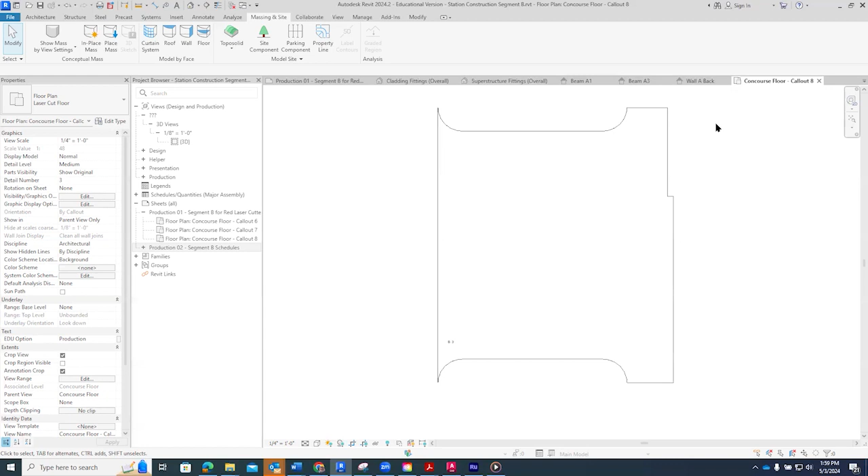So PDF is the best way to do this. Set up a sheet at the proper size for the laser cutter using the laser cutter view title block. I'll go here to sheet, new sheet, and the red laser cutter. There's the sheet. I'll give it a name - Segment 8 for laser cut 02. And I'm going to change this number back to 3.

So here's our sheet. If I click on the title block, you can see that it's 2 foot, 11.5 inches by 1 foot, 11.5 inches. So it'll fit on the laser cutter bed.

Now all I have to do is find my views here. In production, I've got the views here in floor plans, laser cut. I'm going to hide these just to get them out of the way. So our object here is we've got our sheet, and all we have to do, as usual, is drag the drawings out on it.

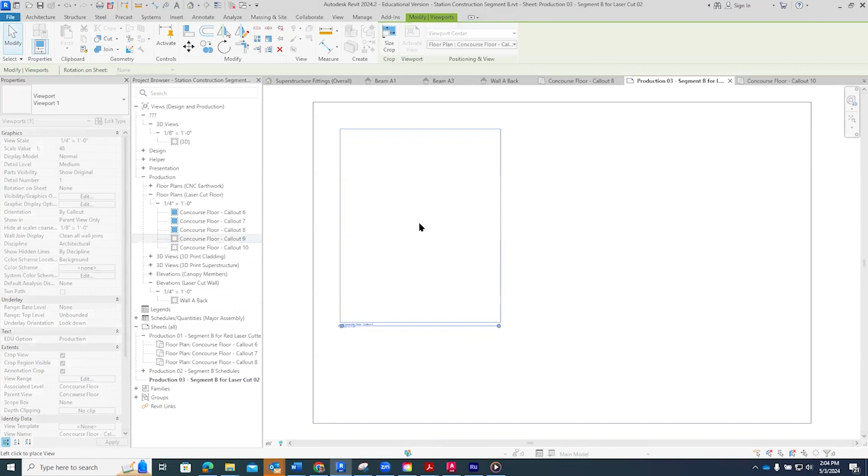You'll see this drawing is a 1/4 inch equal a foot. That's good, that's what we want. And I'll drag this one on here, and I can line them up nicely to be close enough together so I'm not wasting a lot of material, yet leave the separation that's required for laser cutting.

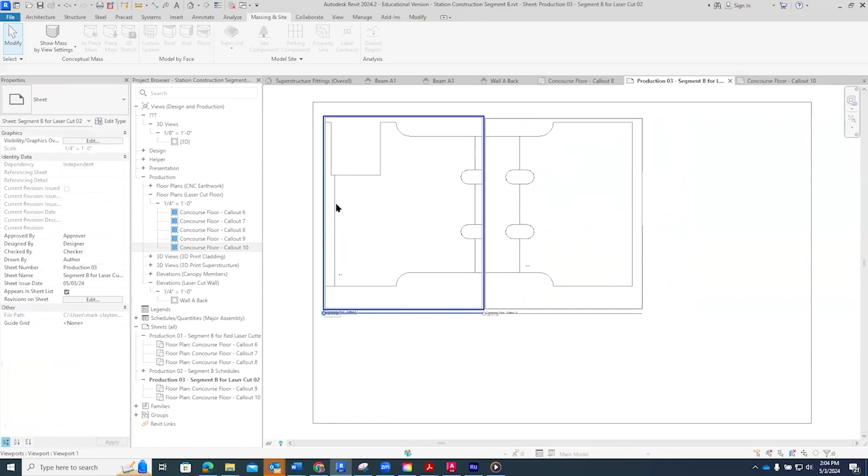So here's our floor. If I double click on this, I can go in and edit the drawing as the view itself. If I click out here, I go back into paper space, working on the title block and the sheet of paper. But I need to do a few things here on the inside. I mean, it looks good, it's just what it should look like.

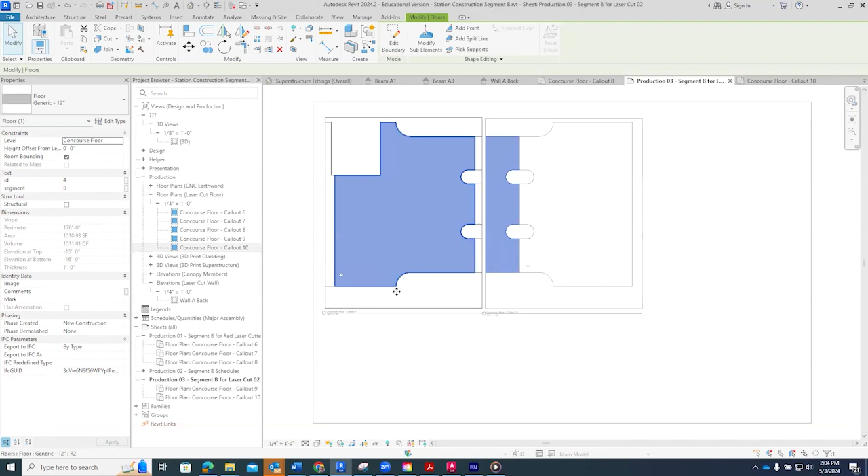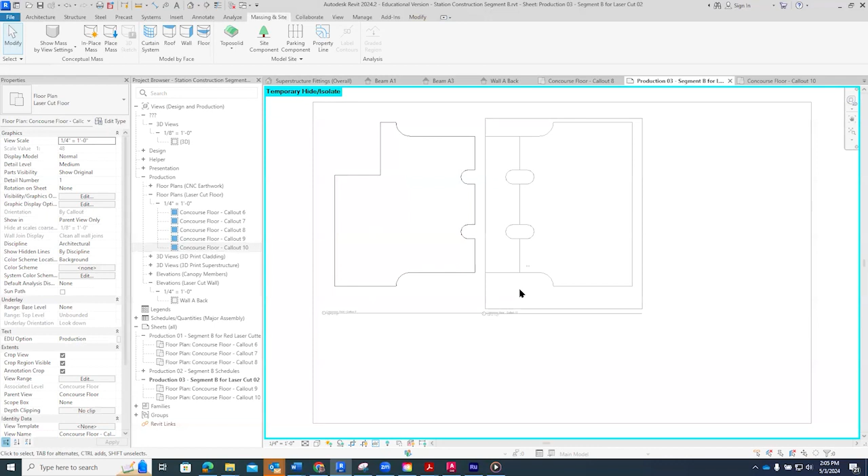So I'm going to take this - I clicked on that object, and I'm going to isolate the element, and now that's all I see. And I'll go to apply that isolate to the view. So that's what's in the model.

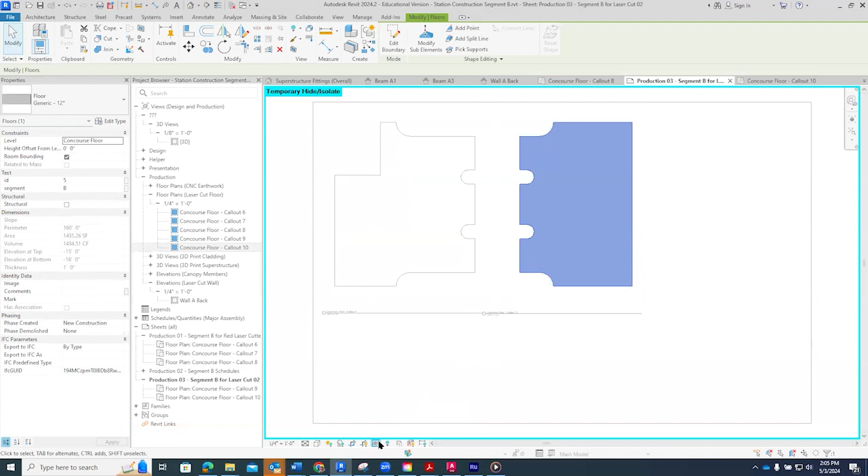Now, if I double click on this one, I can also click on that object and isolate the element and make that permanent as well. Okay, move it over like that. It's too tight, I need to move it back a little. It's kind of an interesting thing - Revit will snap two drawings together like that.

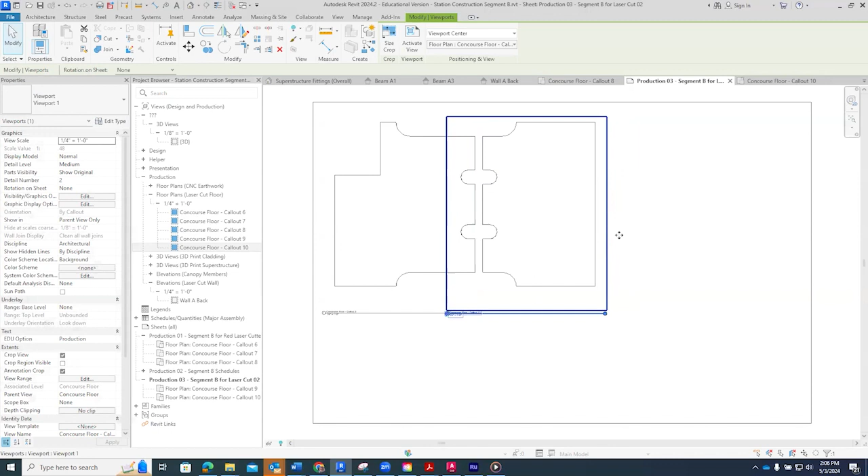And I can use the arrow keys to move it slightly. So that looks good. Now the next thing I want to do is add tags to these elements.

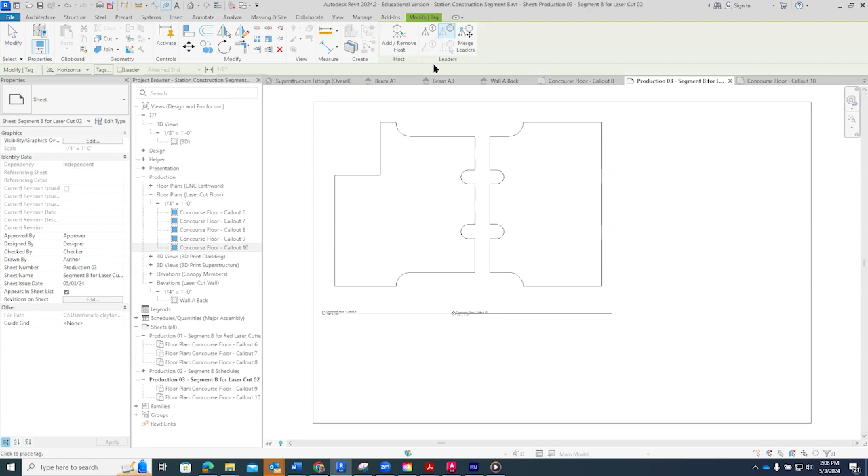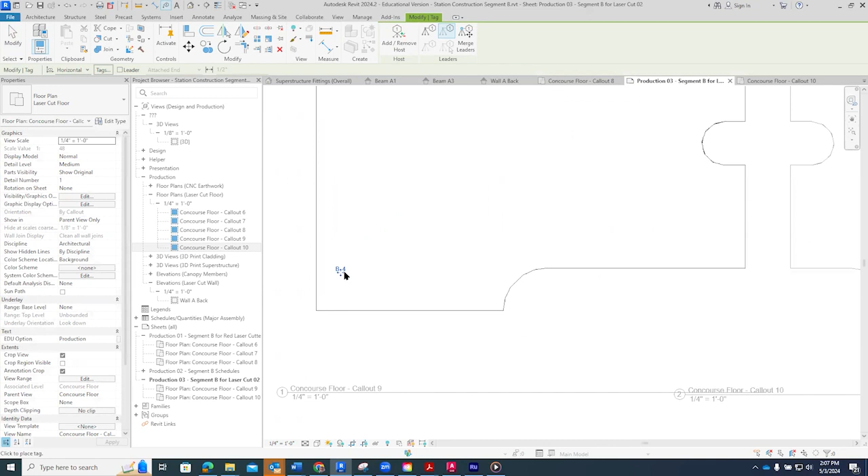So if I come here to the annotate menu, I can add a tag by category. I need to activate this view and then tag by category, and it finds that and places a tag right here. And it's got a move icon, so I'm going to move it down here to the corner. And that looks good. I could zoom in on it - B4, that's the right number.

So I've set up these tags to use values that are embedded in the drawing itself, or in the floor itself.

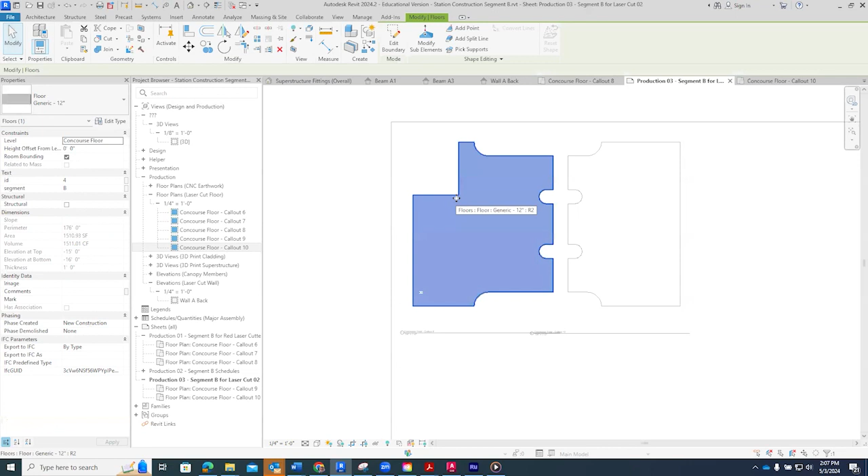I have to press enter to get out of doing tags. If I click on that, you'll see that it's got ID 4 and segment B, and that's what goes in the tag here. So it's automatically doing that for me.

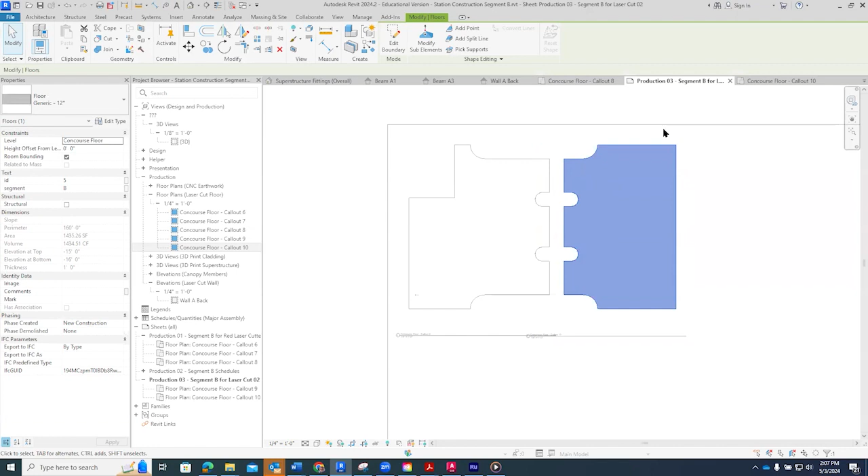Now I'm going to double click out here, and then I can come back to this view and double click inside and click to select that object. I don't actually have to select that object, I just have to go to annotate and add a tag to it. So I get a tag and I can drag it down to the right place. When I get it where I want it, I press the enter key, and we're done with that.

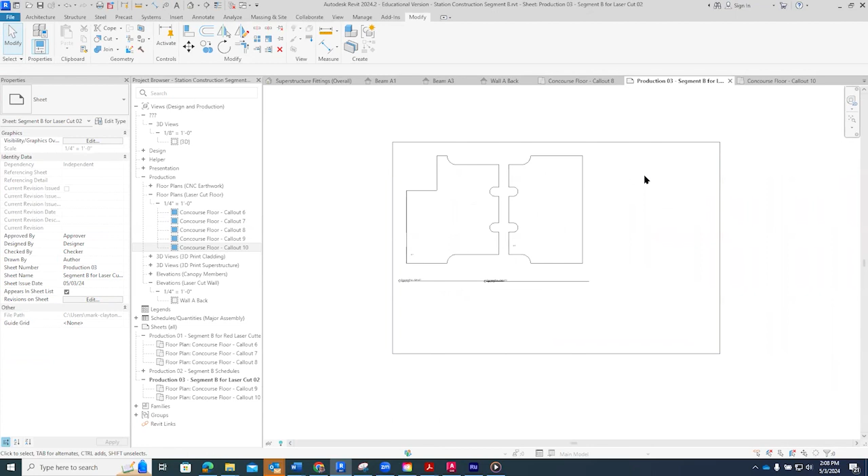So now we've got our floors laid out on a sheet. I'm going to click on this, and I want to turn off these little titles. I've got a template set up, a viewport type set up for laser cutters, and it turns that off.

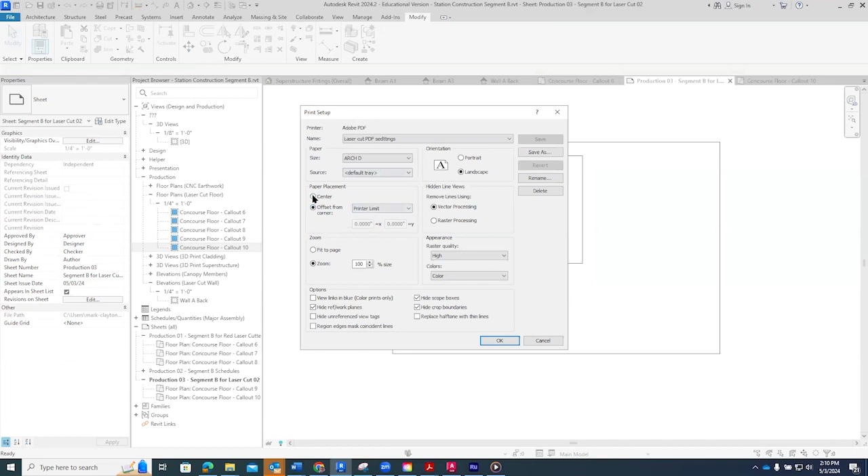So that looks better, and now I can come here and print. I may want to check some of my properties, check the setup here: Arch D, center it, zoom 100%, landscape. That all looks good, and we'll print.

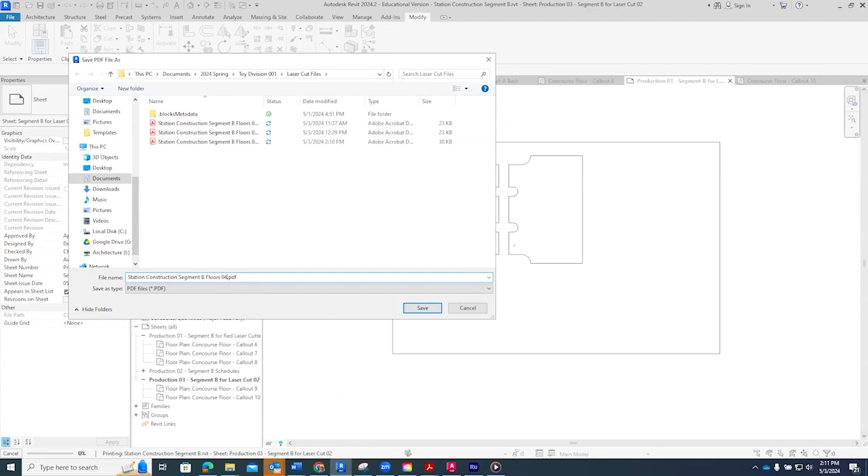And I'm going to save on that. I guess it's open in Acrobat, so I'll call it 4. All right, so it's done, and it's got the tags on it. So it looks good, I can zoom in and see the tags. Yep, they look great.

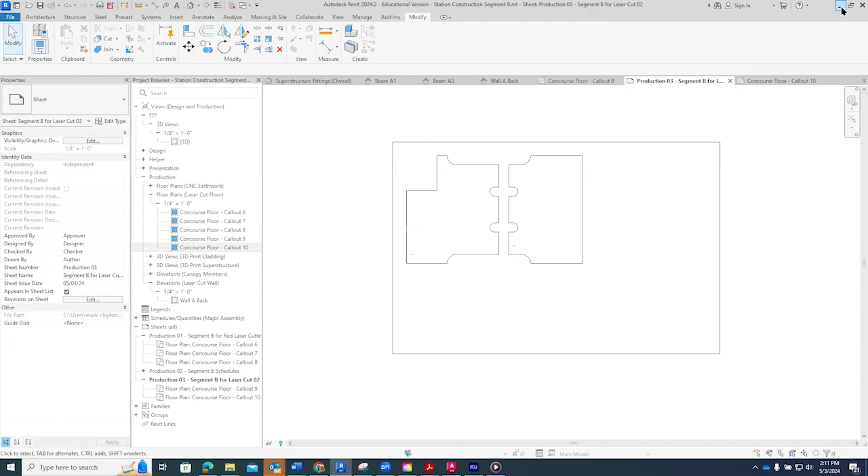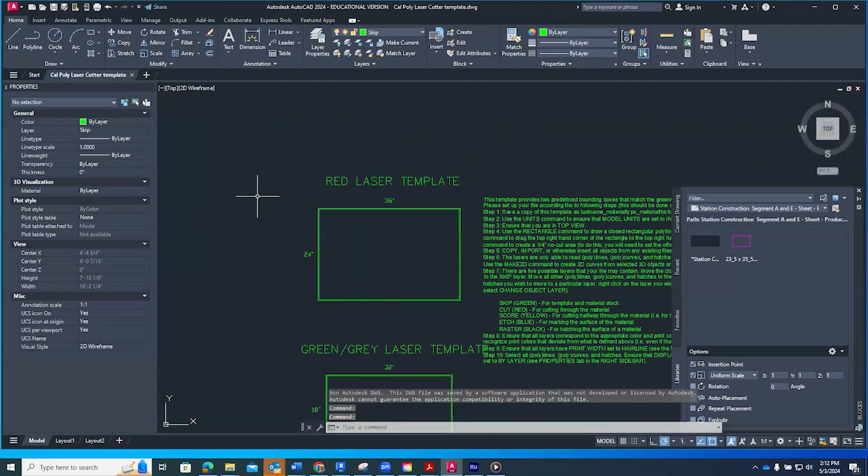So my next step is to load this into AutoCAD, and I'm going to open up AutoCAD to do that. So I've got AutoCAD open. This is how it's going to look in just a minute, but we're just going to close this file. I'm going to open up my laser cutter template here, and there it is. It's got all the instructions on how to use a laser cutter template. It's so easy.

I've got my properties menu available over here. If you don't have the properties available, you can come to the view and look in the palettes and see properties, and I've got properties.

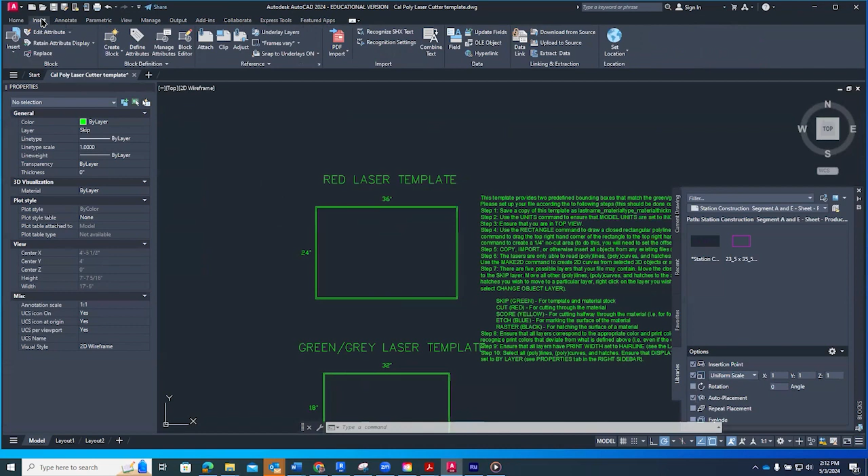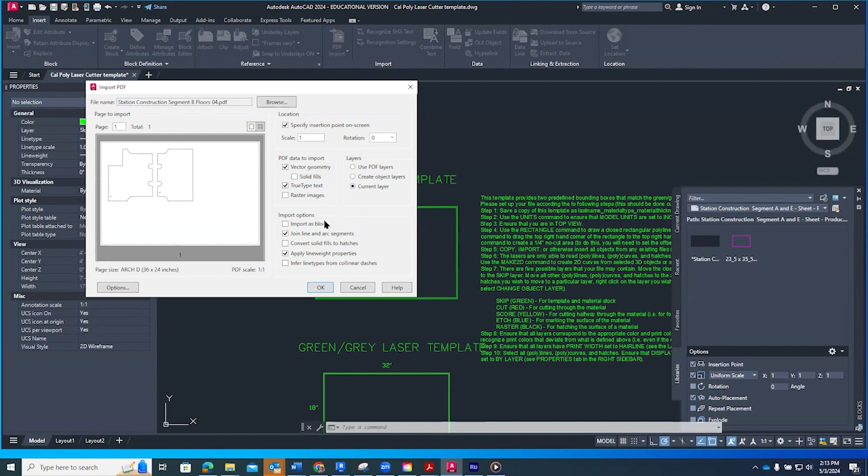What I have to do is insert this PDF file. So I go here, find the file, 04, that's the one, insert it. I'm going to click here and say use the current layer, and that looks fine. So I'll tell it okay, and there it is. And it's green, that's the current layer. It is just the right size to fit on our block here, our cutting sheet, and I place it, and there it is. Okay, of course it's not quite right because I've got to put it on the right layers.

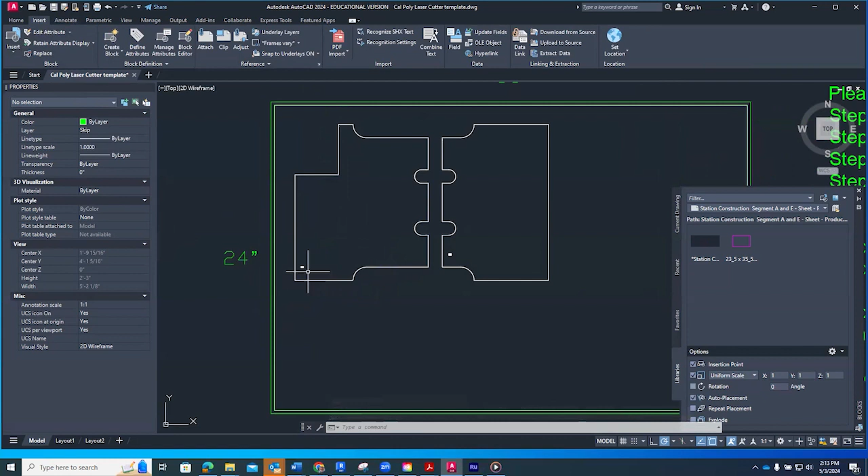So I'll select them and I press the space bar, and then I can come over here and pick by layer, and yes indeed, they're now on the cut layer, and they turn bright red.

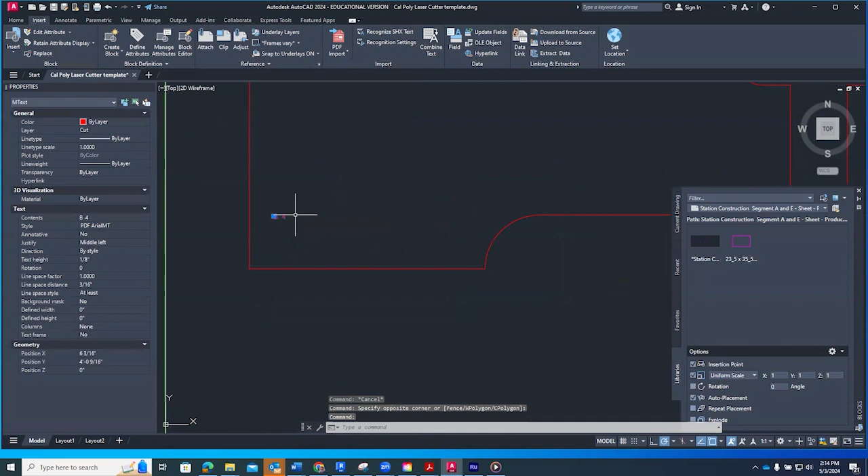Now these down here are not the way I want them to be. They should not be cut, they should be etched. So I'm going to select them by clicking on them. I have 2 things selected now. That's good, and I go over here and I pick etch. And now they're blue, the way the etched layer is supposed to be, and they're right where they should be, and they've got the right numbers. So it all looks good.

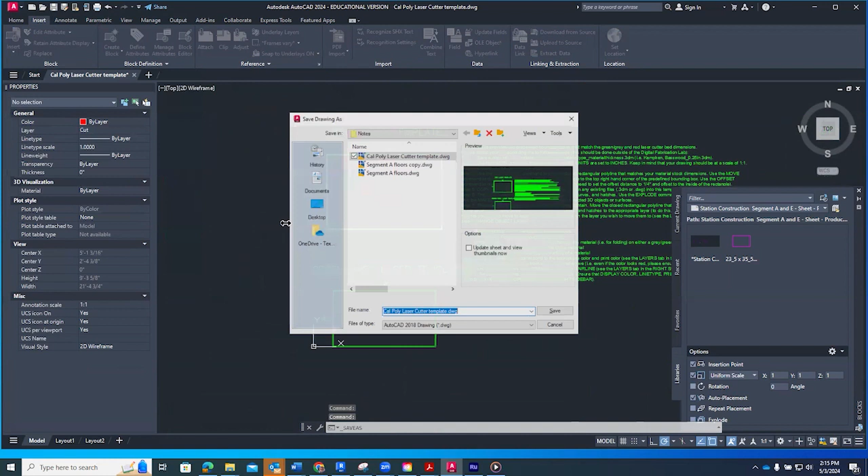And then I'm just going to save it. I'm going to save as, because I don't want to save it over my laser cutter template drawing. I need a new name for the drawing, and I'll call it floors copy. Let's just call it floors copy. Replace it. All right, that's how you set it up for the laser. You then take it to the shop personnel, and they will help you get going the rest of the way.